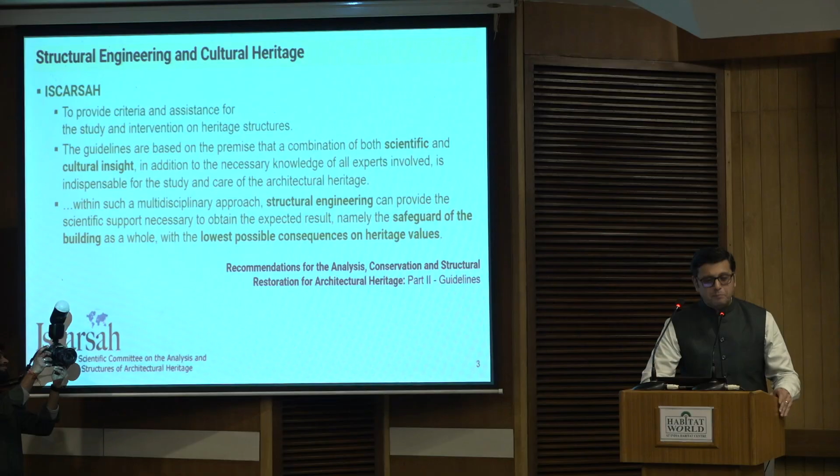So, in the 20th century, many of you are aware that organizations such as ICOMOS, the International Council on Monuments and Sites, were instituted. This was after the Second World War, and several advisory bodies to ICOMOS came up as well. One of them was ISCARSAH, and ISCARSAH is an active body today. ISCARSAH stands for International Scientific Committee on the Analysis and Restoration of Structures of Architectural Heritage. It's a long expansion of that acronym, but basically it looks at the structural aspects of historical constructions. Now, very much in line with what Jean Mignot talks about, ISCARSAH tries to give a basis, different criteria to study and intervene in heritage structures. And this body and its guidelines explicitly state that you need a combination of both scientific and cultural insight, and the knowledge of all experts involved. And this is indispensable for the study and preservation of architectural heritage.

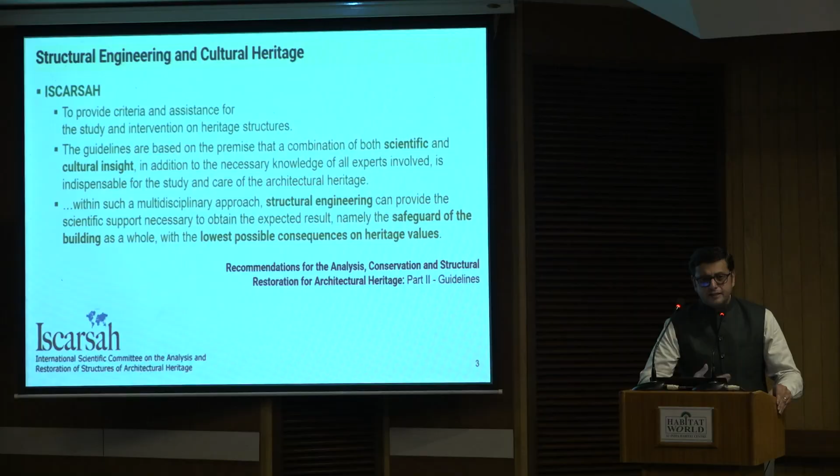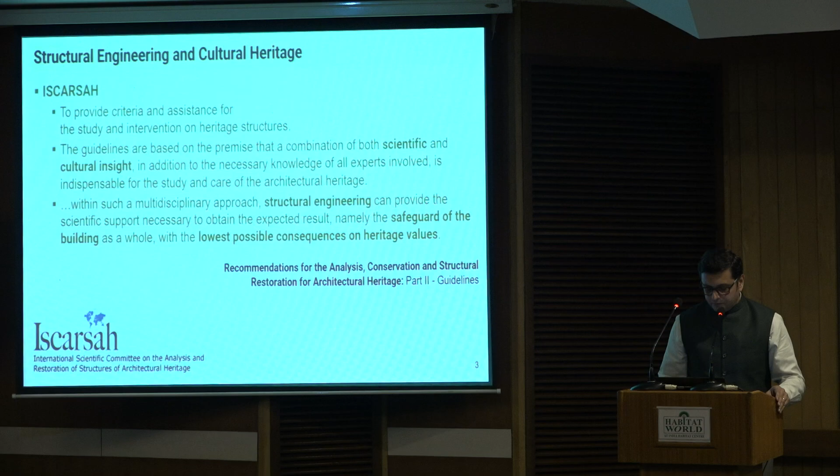And when you look at a very multidisciplinary stage where professionals have to interact, ISCARSAH identifies that structural engineering can provide the scientific support to obtain the expected result. And the result is really the safeguard of the building as a whole, but with the lowest possible consequences on heritage values. So you need to intervene to preserve it. And when you intervene, you have to be conscious about what the building stands for and ensure that those interventions do not dilute or erase those values. And structural engineering has a very important role there because it determines whether the structure survives or not. So I see the words of Jean Mignot and what ISCARSAH tries to do today in engaging the professionals involved in heritage conservation as quite coherent. What I've tried to do today is put together 5 examples.

As I said, all 5 don't deal with the ancient traditional knowledge system of Vastu Shastra or temple building, but they're all examples from India. I do have an example that really talks about where this Vastu Shastra and going back to Vastu Shastra can actually inform the subject of built heritage conservation.

So let me begin by talking about the Puri Jagannath temple. This is one of the most famous living temples, which is also an archaeological monument. The Puri temple is probably one of the busiest temples in terms of the number of pilgrims visiting the temple in a day. The focus of our work was really one beam in this 800 plus year old temple in the Natya Mandap. You have multiple structures within the Puri Jagannath temple. We were looking at one beam in the Natya Mandap which had cracked.

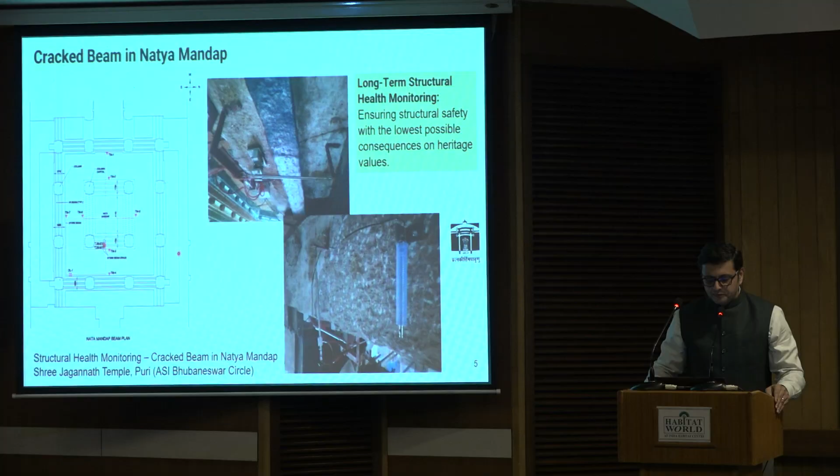Well, it's an interesting symmetrical structure, and right in the center you have four massive pillars, and there are beams that are supported by these pillars. And of course the roof comes and sits on top of it. Now, what really brought us to this particular project was what happened a few years ago in the Jagmohana, which is the larger mandap that is behind the Natya Mandap. The Jagmohana, with almost a similar configuration, in its central zone, with 8 massive beams, had all the 8 beams cracked.

Now, when these beams cracked was really not known. These cracks surfaced and were visible in 2015. And the question was, did these cracks really happen in 2015? But probably not, because these massive beams were plastered with lime and painted over, and there was a decision to take off all the plaster in the structures in Puri Jagannath temple. And when they started removing the plaster, they saw all these 8 beams had cracks.

So what was interesting is these cracks were wide. They had completely split the stone, and the lime was actually inside the crack, which is an indication that the lime plastering was done after the crack had formed, and it was not a recent phenomenon. So possibly the crack has been there right from the day it was completed or sometime later.

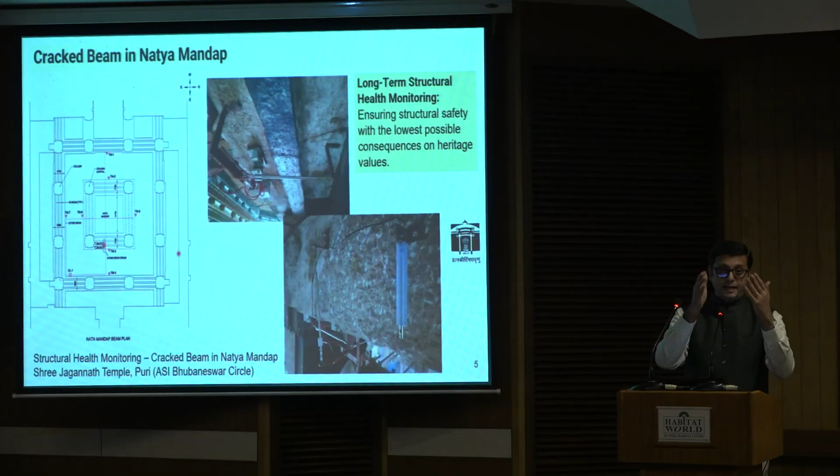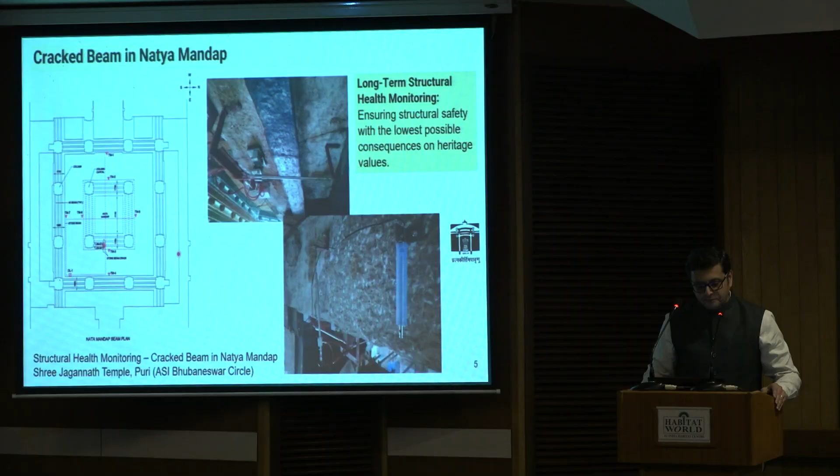But the entire discussion within this multi-stakeholder environment led to a situation where even before any scientific investigation could be done, all the 8 pillars were completely supported with very heavy steel columns, eventually reducing the space that you have to view the deity, which was really not a desirable outcome. Discussions went on for a few years, but it was a very difficult, very heated environment where decisions were taken without consideration of how the structure is behaving.

So a few years later, when a crack surfaced in the Natya Mandap, a few of us were very clear that we're not going to be putting any sort of support system there without studying these cracks, without understanding whether these cracks are really causing a structural danger to the life of the structure there. So in this particular case, since it was one beam, I think we had our way, and we were able to install sensors. It's very much like the human body: you can do tests, have sensors there, and study this for a period of time. Of course, you want to study them for a sufficiently long time, but a crack is a crack, and everybody wants action taken when they see a crack.

This was a court-monitored activity, and hence some decision had to be taken quickly, but you need at least 2 seasonal cycles to really understand if these cracks are structural in nature and if the movement in the building is dangerous. Why 2 seasonal cycles? Because you want to see whether the crack opens and closes with the variation in temperature as you go from the summer months to the winter months, and not because of structural loading. So this needed to be established. And as I said, we were able to buy time and examine the behavior of this crack for about 5 years.

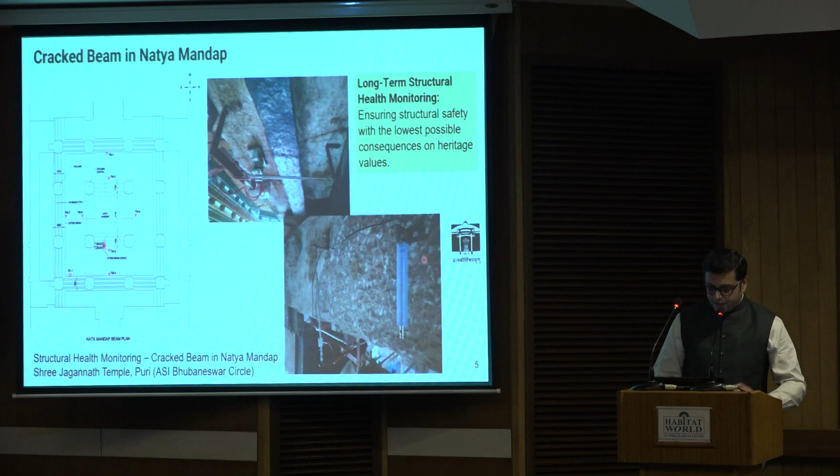And what you see here is the cracked beam and the sets of instrumentation that were put there. We put crack meters in place. We put a tilt meter in place to study how the entire system is behaving. And what you see here is a system which was accessible remotely.

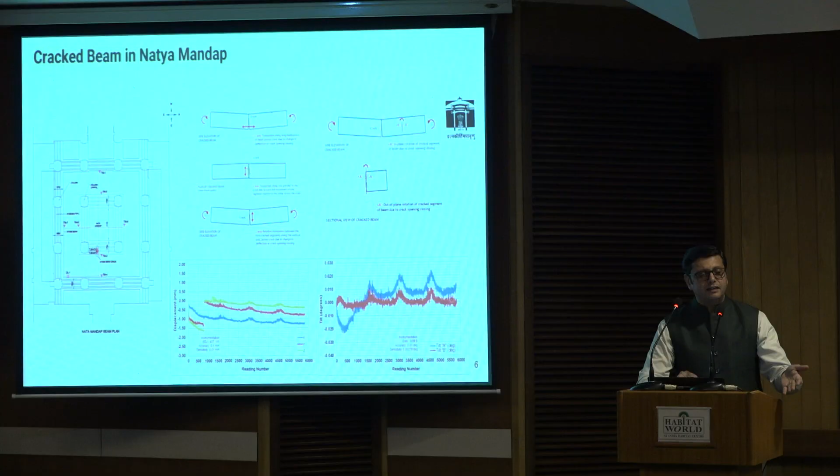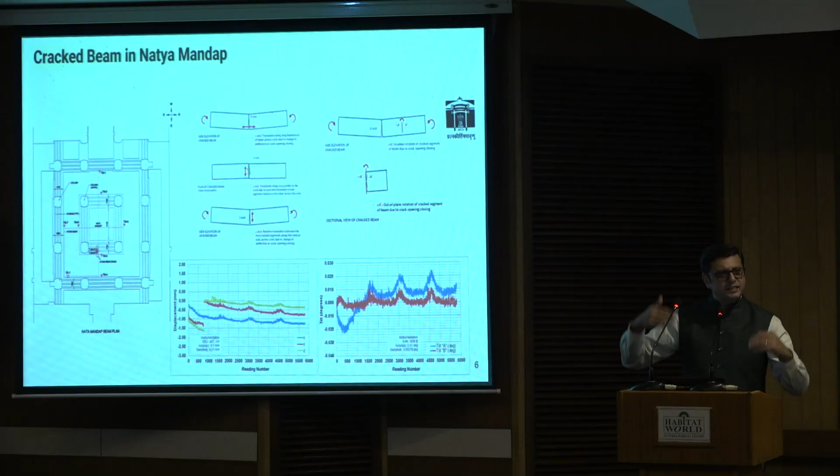Today, with all the technology that's there, we could access the data sitting in our offices at IIT Madras. And for a period of 5 years, every 4 hours, we had measurements of deflection and measurements of the tilt in these beams. And it became quite clear that at the end of the cycle, one summer and one winter, it would come back to its zero position and then continue the cycle. So you see it oscillating about a certain zero position.

And this was good news, which meant we had time to intervene, and since the crack could not be left unattended, the final intervention was carried out after a few years, but in a very careful manner, not to block the view that is there of the deity or the other mandapas from the Natya Mandapa itself. So eventually those beams were strengthened by adding additional steel beams in a way that was hidden away between the existing supports.

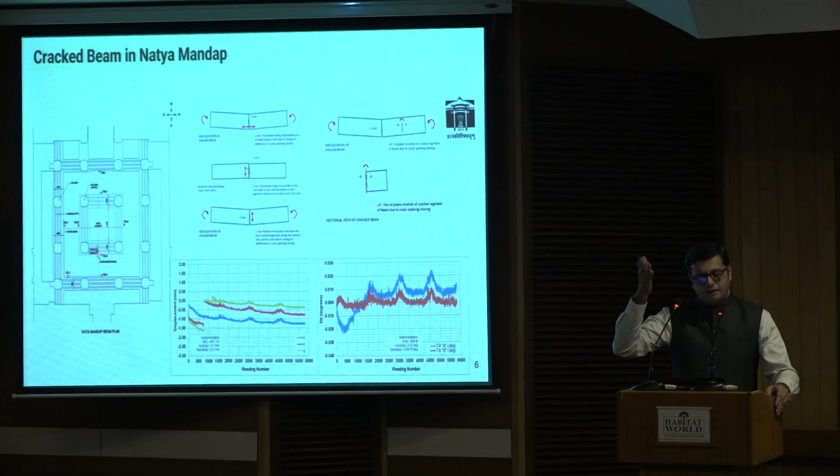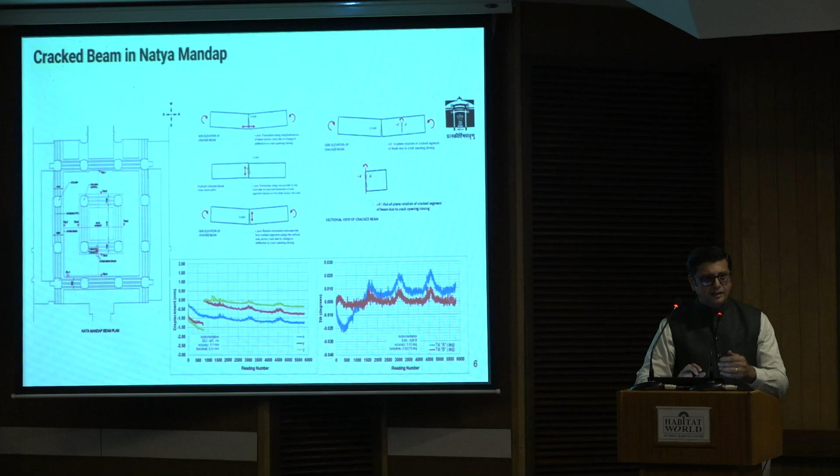So this was an interesting project where the understanding of the structural behavior was given the time and space required to then be able to intervene in a manner that does not change the essential character of the space. And this is where structural engineering really comes in. And this project was really, I would say, one-off, because very often it goes the other way, and then you want to put in very heavy interventions just because you're scared looking at the crack.

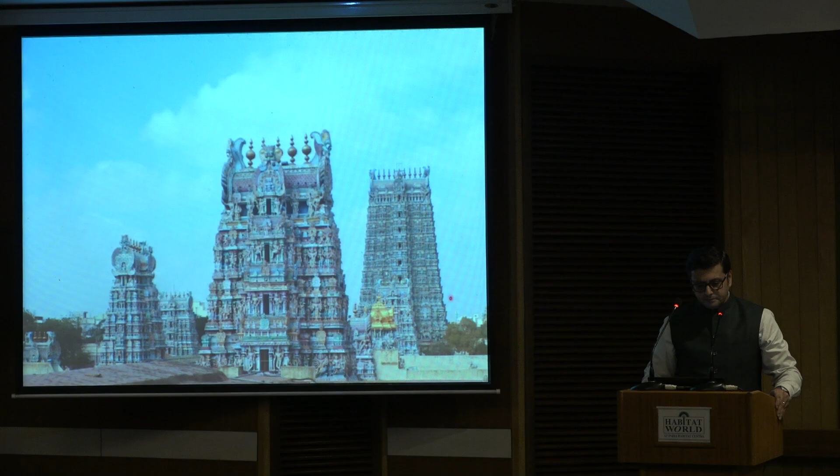The second project that I want to talk about is another interesting project, but there was a fire. Many of you must have visited this beautiful temple. It's the Madurai Meenakshi temple in Madurai, Tamil Nadu. In a part of this temple, on 2nd February 2018, it's 4th February today, there was a fire in one of the mandapas, and this is a 500-year-old mandapa called Veera Vasantharayar Mandapa, built in 1611.

It was full of shops, and it had a lot of wiring. It had a lot of plastics. It had a lot of wood. And at the end of the day's prayers, when the temple is shutting down and shops are closing, typically there's a ritual that's carried out. There's a camphor lit on a pumpkin to ward away the evil eye. And then the pumpkin is broken. The camphor just falls on the floor, and unfortunately, a piece of lit camphor goes into one of the shops and then starts a fire.

And this is around 10 p.m. in the night. And CCTV cameras capture the entire proceedings. And by about 10:15, 10:20, the whole space is filled with smoke, and the fire begins. And unfortunately, the fire engine stationed in the temple, this is a temple that is visited by hundreds of thousands of people in a day, didn't have water, and so they couldn't really douse the fire immediately.

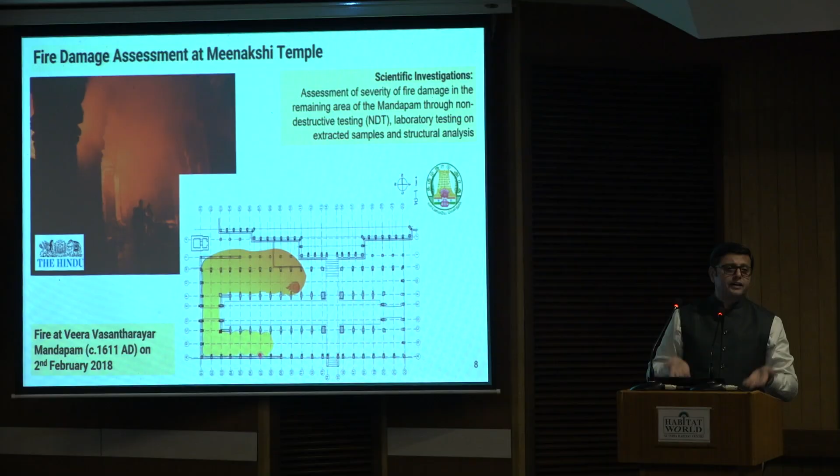And by the time the fire engines could be mobilized, the entire mandapam was burning, and there was so much inflammable material. The fire could be doused only after 5.5 hours. This Veera Vasantharayar Mandapam has about 110 massive stone pillars. It's a very tall construction. The fire spread to about 50% of the structure, and hypostyle halls are typically open everywhere, and you have a slab on top. So almost like a furnace, it was heating the beams and the slabs, and you can imagine if that went on for about 5 hours.

So it was about 4 a.m. or so that the fire tenders could actually douse the fires, but by then beams had cracked, slabs had broken, and the structure had suffered significant distress. What you can actually see are the broken beams, the slabs that collapsed, and what you can see here is granite that's melted. And that's something I was seeing for the first time. You can see that those beautifully carved stone beams have just become like plastic members.

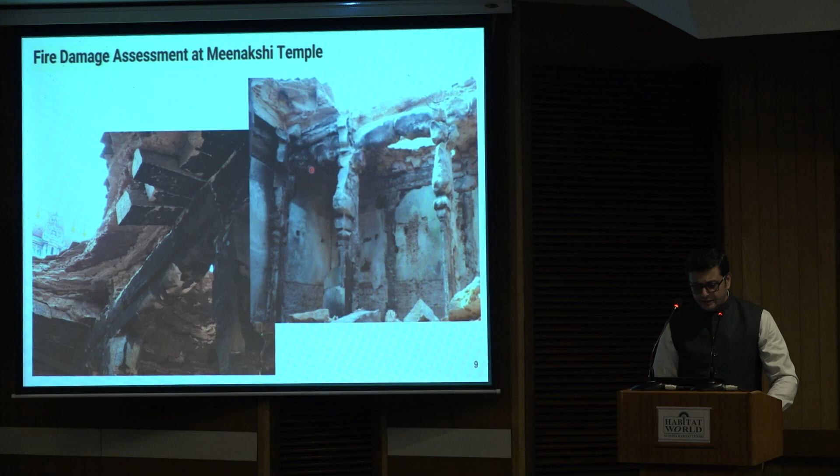So this was the state, and therefore, immediately the decision of the temple authorities was to start pulling down the entire structure and reconstruct it, because this is a living temple. But that's where it was important to take a step back and really see if it was essential to pull down the entire structure, given that it's a 500-year-old construction.

When this happened in 2018, the government announced that they would rebuild the structure in 6 months. But the wisdom of the committee that was actually looking at this, a multidisciplinary committee of about 12 persons, prevailed, and we were given the opportunity to really study the effect of the fire on the stone.

What we were able to discover was that the fire had actually spread in only about 50% to 55% of the entire structure. The rest was heated but not in direct contact with the fire. So we launched a detailed field experimental campaign, taking samples from all the pillars and beams affected by fire, and slabs which were still intact, to systematically understand what had happened to granite exposed to different stages of fire.

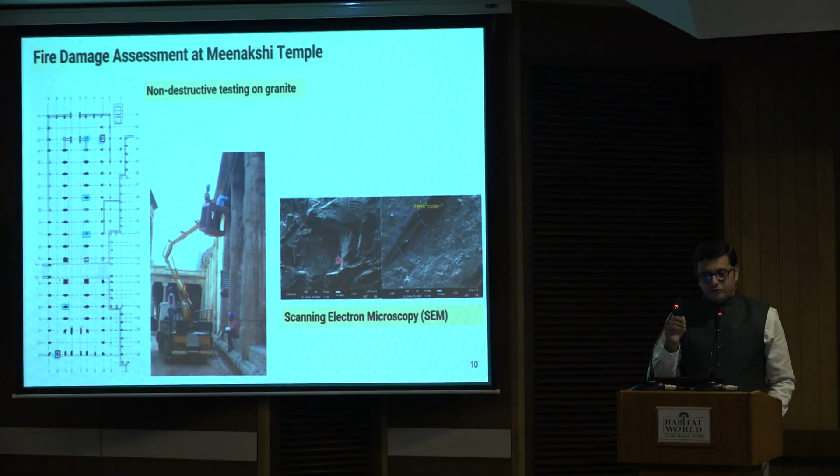You could see evidence of ferric oxide in the granite. The fact that granite is a very strong stone is because of the presence of ferrous oxide, one of the strongest types of stone for construction. But you didn't see ferrous oxide in these images, only ferric oxide, which meant ferrous oxide was converted to ferric oxide due to oxidation and the heat process. Ferric oxide forms at about 623 degrees centigrade, meaning all portions showing ferric oxide had reached about that temperature.

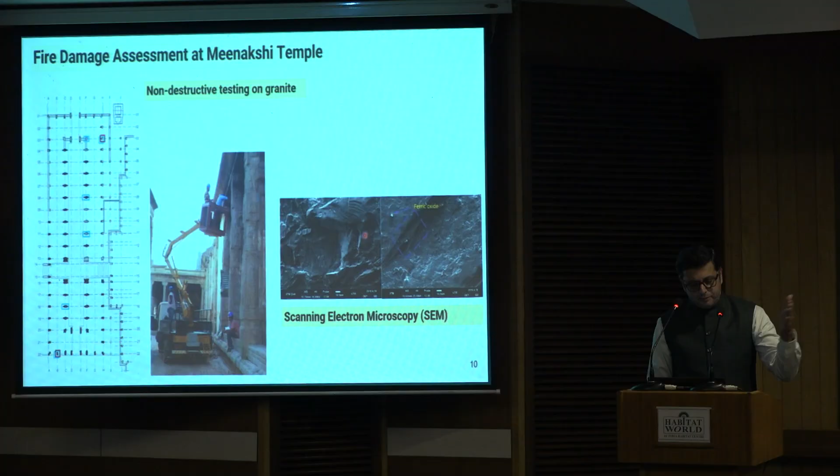Granite melts at about 1,300 degrees centigrade. So this was important forensic information to understand which parts of the structure were affected to this extent, and which were not. This and a series of other tests involved taking samples of stone from 6 different degrees of damage to study what had happened to the stone.

We were finally able to convince the authorities that about 50% of the construction could be retained as is, and that a 500-year-old construction need not be pulled down and reconstructed into a brand new mandapa, losing its historicity. The decision was finally that only 50% would be pulled down; the rest, what you see there, is retained.

Currently, about 6 to 7 years after the tragedy, the stones that are going to replace the ones taken down are massive pillars, at least 20 to 30 feet in height. These are being sculpted, and in a short while the reconstruction would begin in that dismantled part of the structure.

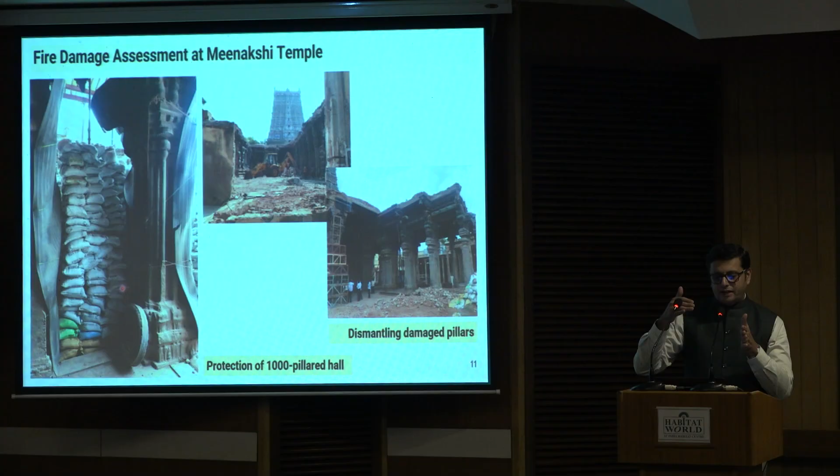If some of you have been to Madurai Meenakshi Temple, this is right next to the 1,000-pillared, or Ayiram Kal Mandapam, which is a sculptural marvel. The biggest fear was that if there was a sudden collapse of the fire-damaged mandapam, or if something went wrong while dismantling, something could fall onto the 1,000-pillared hall and cause an international headline.

This was a big thing they wanted to avoid. So a cut was made right at the top of the structure, isolating the 1,000-pillared mandapam from the fire-damaged mandapam, so that vibrations from dismantling were not passed on. All sorts of methods were used to cushion anything that could fall onto the 1,000-pillared mandapam. This is an interesting project where scientific investigations were able to inform preservation.

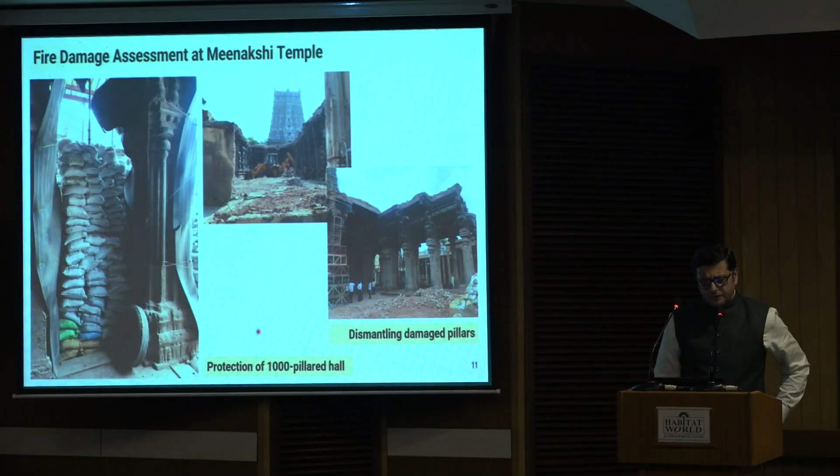Scientific investigations continue to inform the type of stone that needs to be selected. Out of 8 quarries, we've now selected 1 quarry which has stone that matches what was used 500 years ago, through petrographic and mechanical studies and so on. So this was an interesting project that showed how science can help in the process of conservation.

The other project that I would like to talk about is the Rashtrapati Bhawan. And of course, there are many things in the Rashtrapati Bhawan that are extremely interesting.

Professor A.G.K. Menon was leading that project from INTACH. This was a project where the part that I really want to talk about is the sunshades.

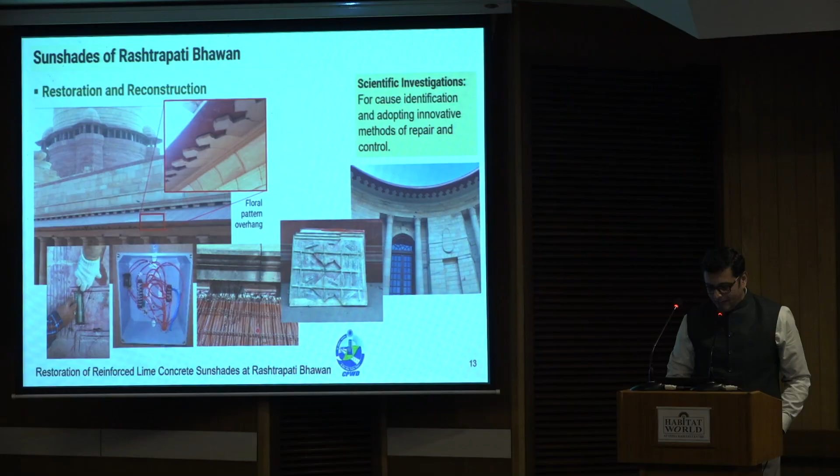These are beautiful sunshades, massive sunshades. As you stand in front of Rashtrapati Bhawan they look like small sunshades, but they're actually 2 meter cantilevers. They're about 1.2 kilometers long if you look at the sunshades all around the building, so it's a huge amount of construction material you have to deal with.

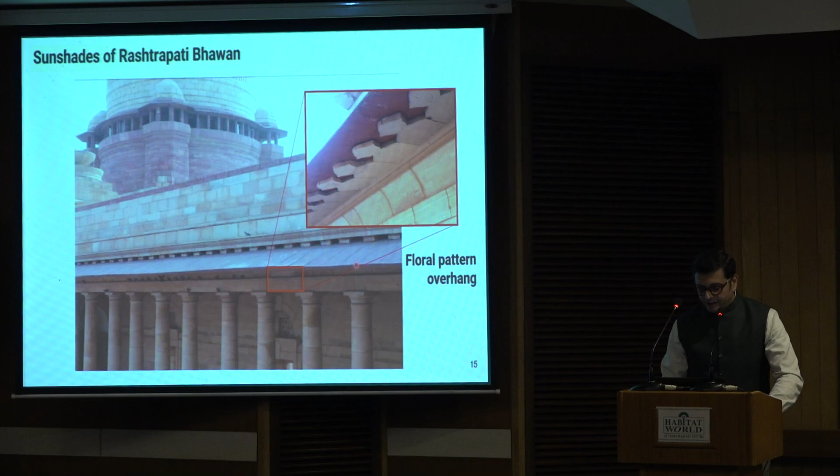Unfortunately they have this very beautiful floral pattern that you can see from the bottom, with red sandstone and pink sandstone combined to create this entire sunshade. But if you go a little closer, they are in really bad shape, and for a moment you would think this is all in stone.

So this is not in stone, this is in reinforced concrete. You can see corroded reinforcement and spalling of the cover concrete. And you don't want to have cover concrete spall off from 50 feet high as you're entering a building, when you have sunshades 1.2 kilometers all around the building, with VIPs and everybody moving in and out. So this was the condition.

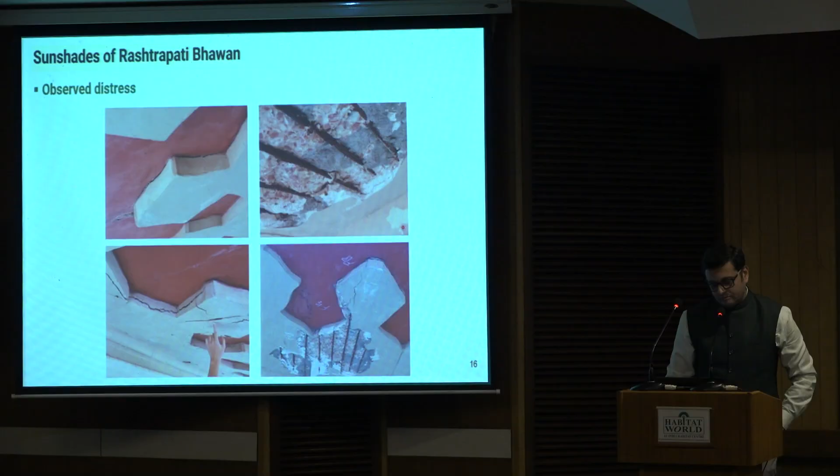This is where we were asked to look at the problem of the sunshades and give some solution. There was a lot of patch repairs, like we do when there's corrosion damage typically happening, but the patch repairs were definitely not working, because the patch plus new material would just fall off very soon. So this needed to be studied.

We did some archival research. We found the drawings, the original drawings. Rashtrapati Bhawan maintains all these original drawings. What's interesting is, after completion of the building, completion drawings signed by the Public Works Department are available in Rashtrapati Bhawan, which is fantastic for any engineer or architect working. To find as-built drawings is a treasure, and as-built drawings were available.

What's interesting is the original plans from 1915 and the 1930s, when this building was being constructed, show that Jaipur sandstone, the pink and red sandstones, were meant to be used for the sunshades. There is information on the procurement of the stone for construction of these sunshades, and details of how the stone was going to be anchored into the walls, into the stone masonry walls. So then you would expect it to be stone masonry.

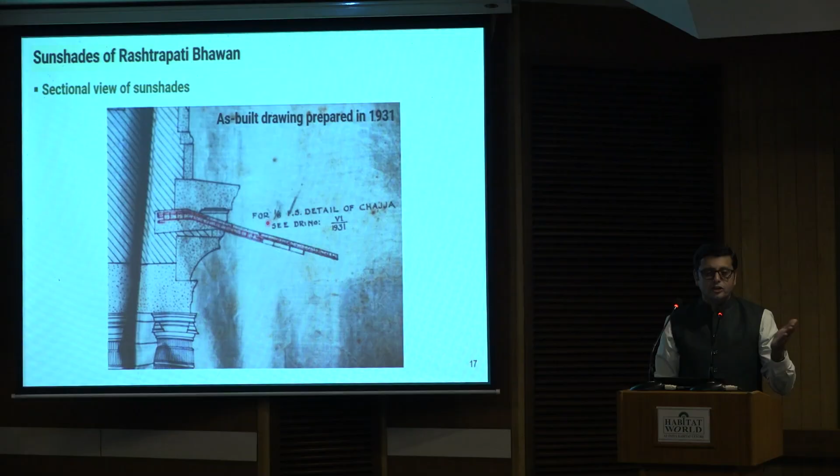And what concrete? That was the second question. This is a set of drawings we prepared after taking measurements and looking at the as-built drawings. We really needed to figure out why there was so much corrosion. If you look at corrosion and the types of steel used 80, 100 years ago, they are not so badly affected by corrosion. It's the modern steel that gets more affected, because to make it more malleable we reduce the carbon content, and it becomes less resistant to corrosion.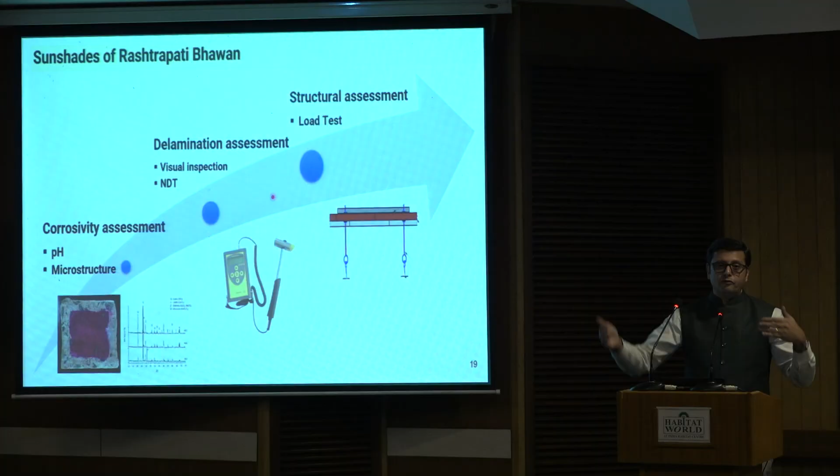So we really wanted to understand what was happening, and a series of tests on the material had to be carried out. We did corrosion measurements and delamination assessment, because in certain locations you could see the sunshade losing its cover concrete, but in other locations you really didn't know what was happening because it looked intact, but it could just come down. We were also worried these sunshades, which are 2 meters long, might just drop off, so we had to do a load test in situ.

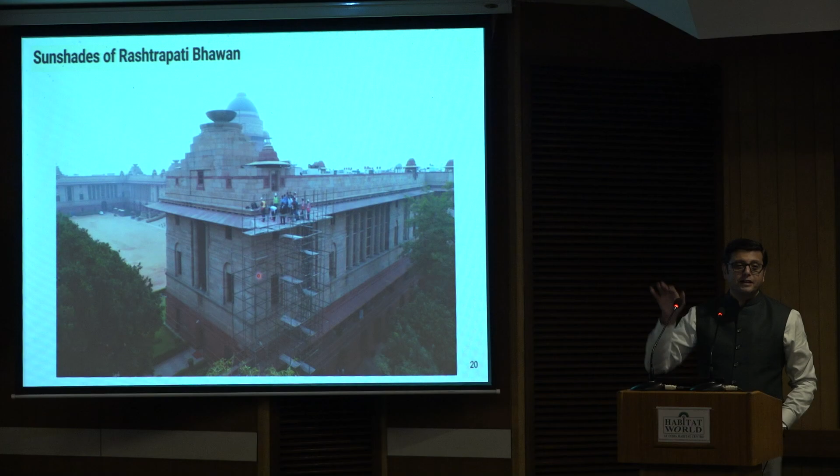This is a picture taken by a drone. We had our team work on the sunshades, walk beneath and above them. We also had the fire department come and give us their fire truck so these sunshades could be accessed. Tests were conducted, and what was very interesting was we found that cement concrete, if cement is used properly, should provide some resistance to the movement of corrosion-entraining elements. But this concrete had nothing like that.

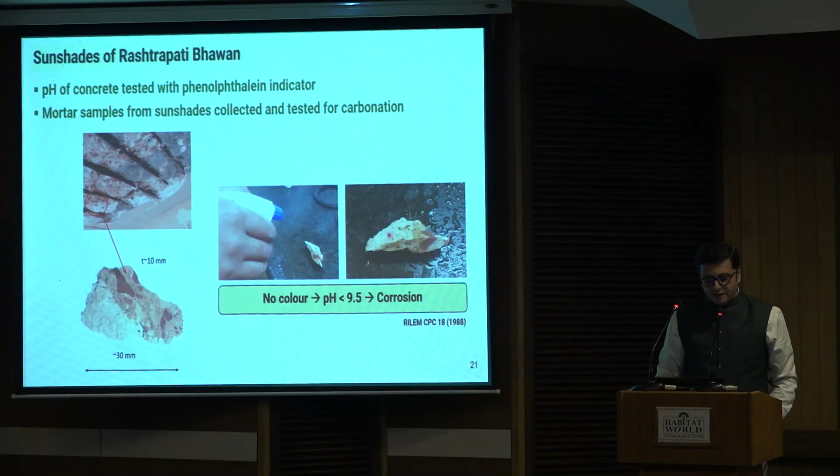And it started becoming evident that it was really lime that was used for concrete and not cement. Multiple tests that we conducted, from visual to all the other tests, confirmed that we were looking at lime concrete and not cement concrete.

The problem with lime concrete is that it does not create what is called a passivating layer that prevents moisture and air from reaching steel. Lime is highly porous and allows moisture and air to reach the steel, and that was really the reason why in about 85 years the entirety of the sunshades had corroded. So this was an incompatible combination of two materials, lime and steel reinforcement, that led to extensive corrosion, and this had to be dealt with.

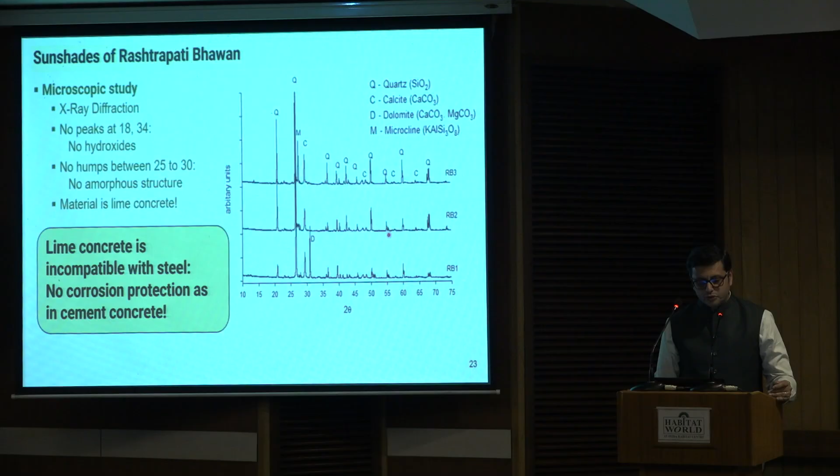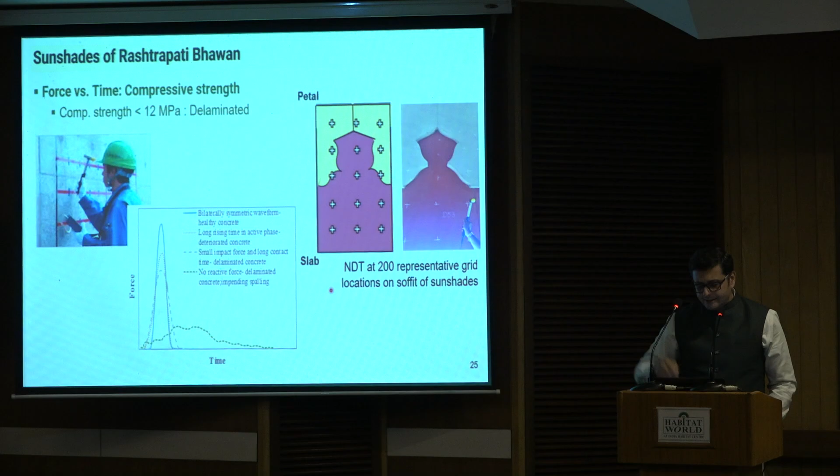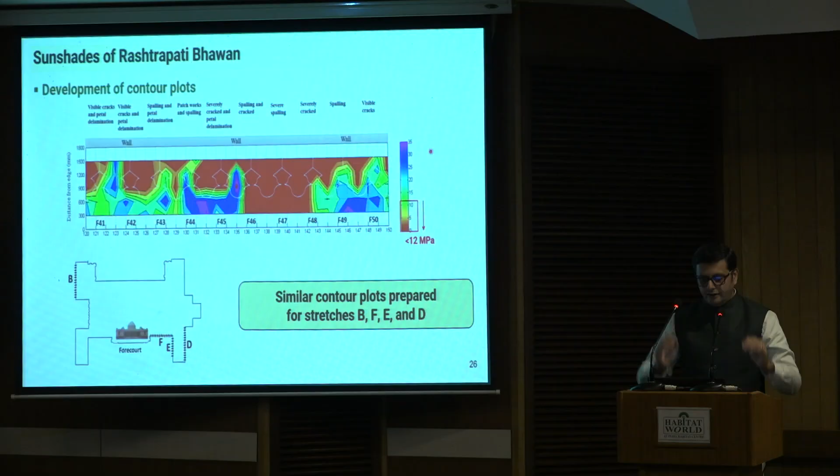We also tried to undertake studies to see how much delamination was happening, and the statistics were really scary. This was done by tapping and looking at the nature of sound you get, and measuring that. This shows an example of a scan, where wherever it's red, it's completely detached, and the other locations, the cover concrete is still more or less intact. The statistics were very worrying.

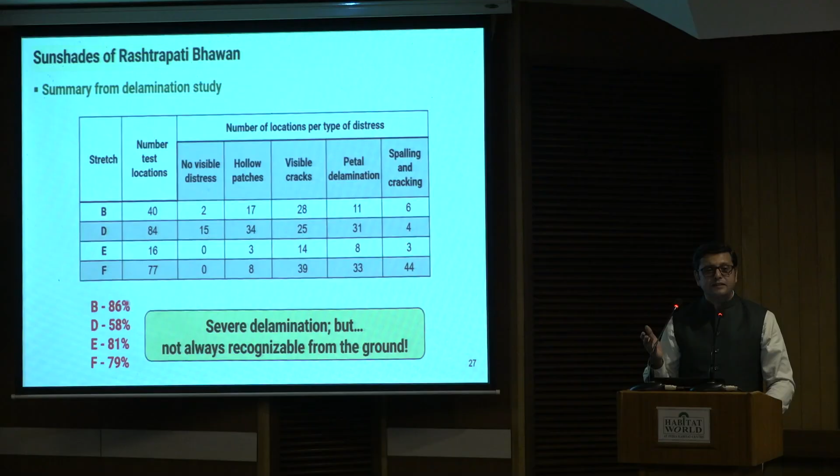We did 4 segments, and in these 4 segments, about 86, 58, 81, and 79% of the cover concrete had actually detached and was waiting to shoot. So it was not safe in any context.

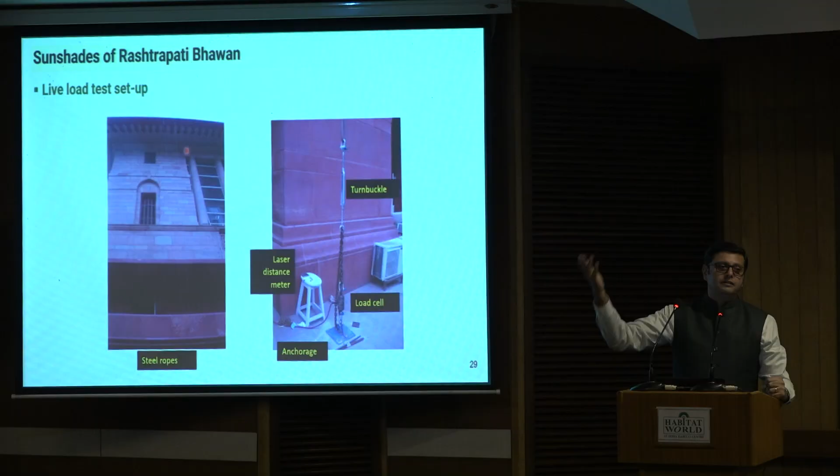So we decided to do a load test. We put this loading beam on top, and what you can see next is how we pulled this beam to try and see at what load this sunshade is expected to fail, because every Independence Day and Republic Day a lot of labor goes onto these sunshades to put up the lighting when Rashtrapati Bhavan is lit up. So there was a safety angle which needed to be addressed.

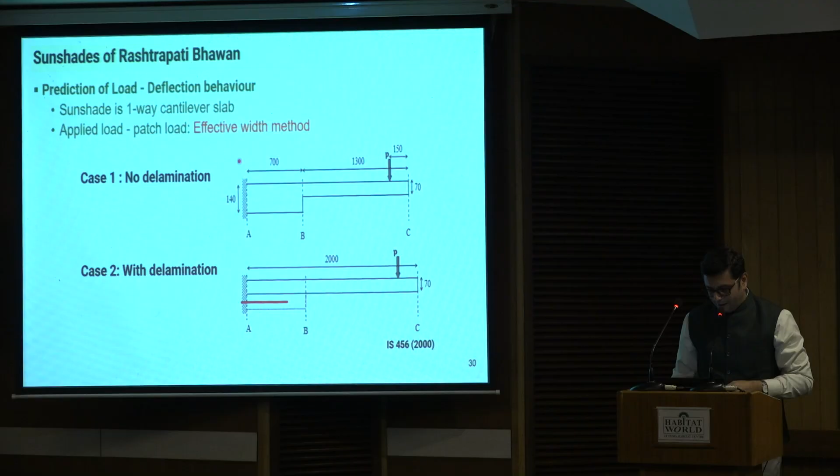So we did this test, and engineers are very interested in doing calculations, so we also tried to predict it theoretically. You start getting really happy when predictions and experimental observations match. We had some theory by which we could calculate how much these slabs are expected to deflect. We did those calculations without the cover concrete, and with the cover concrete completely corroded and partially corroded. Our experimental measurements sat very well with the theoretical calculations, so all the engineers were very excited.

Then what did we have to come up with in terms of repairs? We found that these sunshades were really not precast, they were actually cast in situ. And to give the impression that this was made of stone, they were first painted in pink and red, but they also put a line at the top every meter to make it look like pieces of stone. So they were really not precast, they were cast in situ, and they were all cast together. That reduced the possibility of a single slab just collapsing when heavily corroded. So that was something that we discovered.

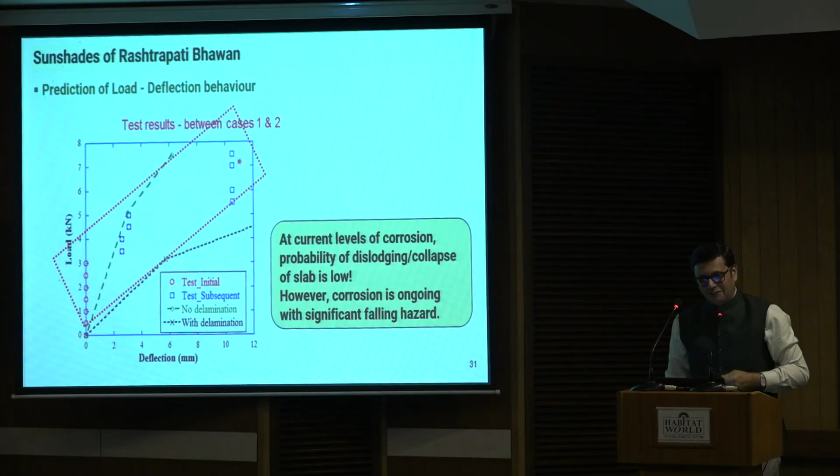Something very interesting happened as we were doing the study, standing on top of it and taking measurements. There was an elderly gentleman who works at Rashtrapati Bhavan. He asked us what we were doing, and we explained that we were trying to find out if a single piece would come down. When we were almost finishing the test, he said, this is all cast together, what are you doing? But it's good to discover the truth for yourself.

Repairs, I think we went through many cycles. We decided we could do protection of the steel using what's called cathodic protection, and we implemented it for about 10 meters as a pilot study. Cathodic protection means you retain the steel, you create an electric current, and you have a sacrificial anode which gets corroded and your steel is saved.

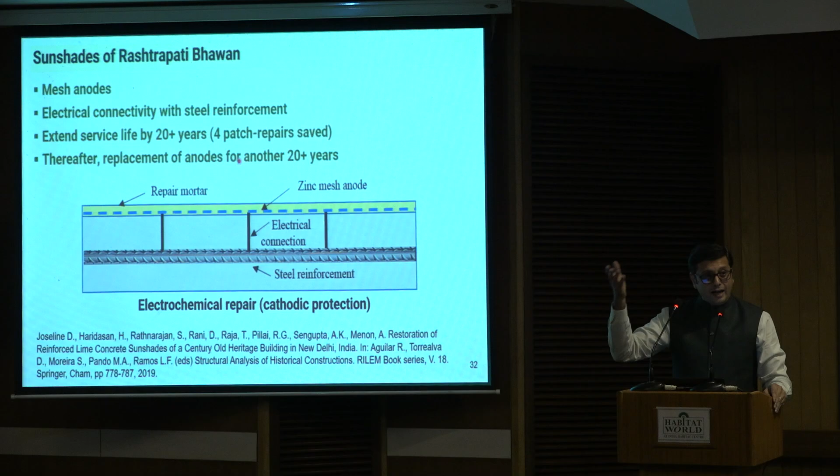So we put that in place. We did it for about 10 meters. It worked very well. The pilot project was expensive, but it worked really well. Everybody was excited after that, and they started dismantling the concrete of the rest of the sunshades to put in place this technique. But then, in the excitement, they ended up with a collapse of a part of the sunshades, so this had

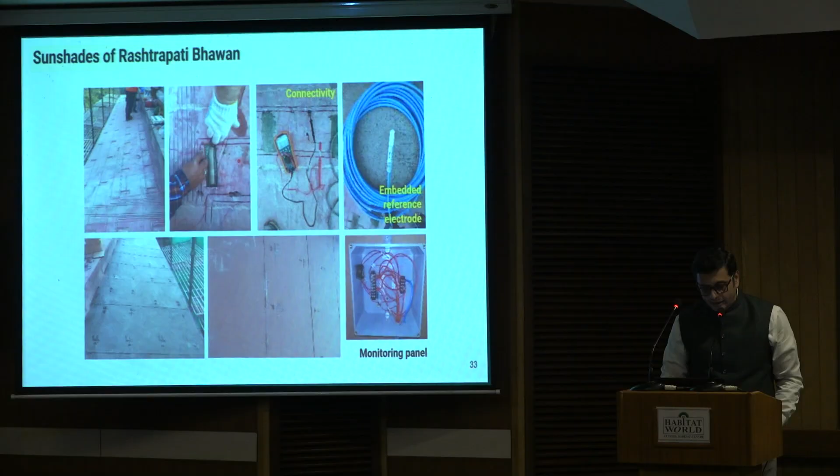to be shelved. And after that, finally, cathodic protection was done, but the concreting was done with fresh concrete for the entire segment, the entire 1.2 kilometers if you want. This was put in place. All this work happened during the pandemic. And finally, molds had to be used to create the patterns that we see, which look like patterns in stone. And we also put the line on top, which makes it look like pieces of stone.

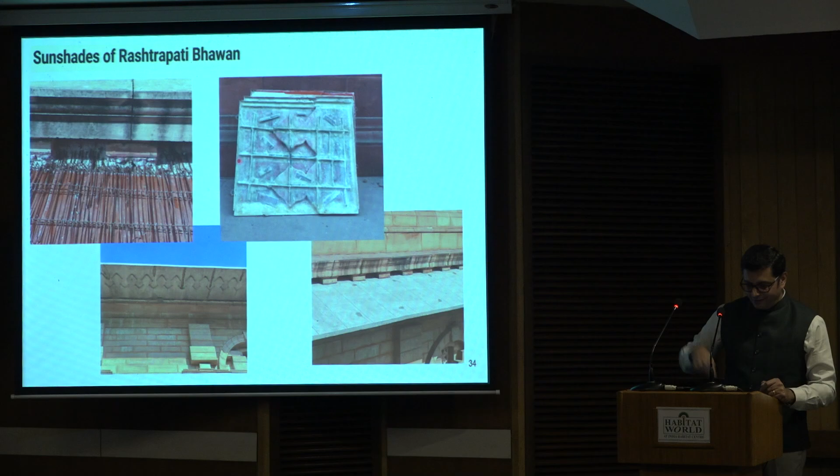This was completed, and today you can actually see fresh reinforced concrete stone look-alike sunshades in Rashtrapati Bhavan. So this was an interesting project where the scientific investigations gave multiple insights on how the construction happened and how the damage actually happened over time.

This is a project of a 12th century Chola temple in a village by the name Thukkachi in Kumbakonam district in Tamil Nadu. And it's called Sri Abathsahayeshwarar temple. And the reason for talking about this temple is really, this was a pilot project that we did in 2020 for the Hindu Religious and Charitable Endowments Department of the Government of Tamil Nadu.

And this is a project where we really took some effort to understand how these temples are built, form and geometry, and structural dimensioning, because a lot of dismantling and reconstruction was required. And from that perspective, these activities are going to be done by the traditional builder, the Sthapati or the Sompura.

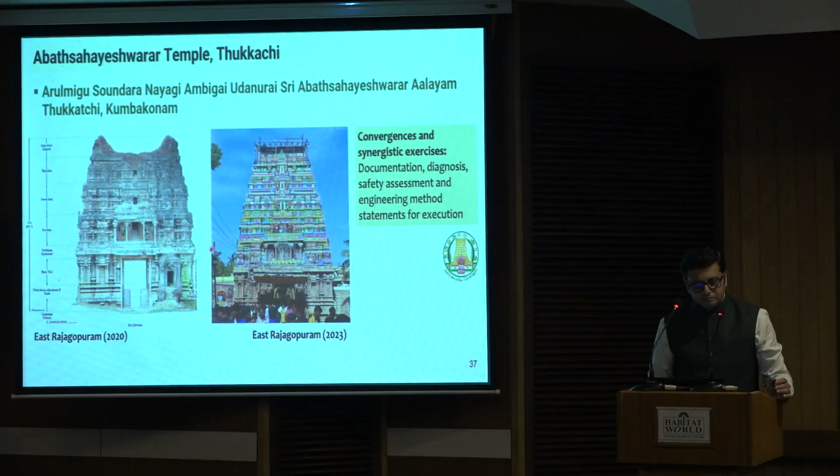However, the project reports are being prepared by engineers and architects who are trained in the modern way of learning. So there needed to be some sort of an understanding of each other's methods. And this project being a pilot project, we really wanted to leverage that sort of a learning. So this structure has been in distress for about 70 years and not been in worship.

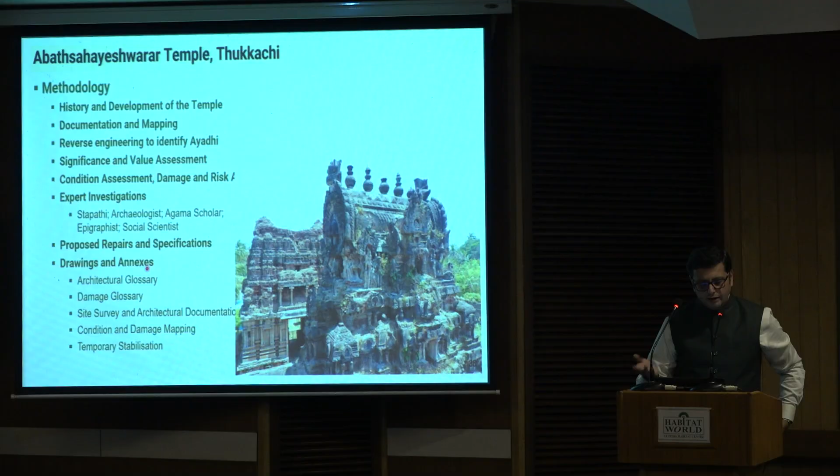It's a 12th century structure, and the pilot project looked at a systematic multidisciplinary study leading to final condition assessment, involving multiple experts, and then coming up with the project report and execution of the restoration. So it's a Shiva shrine built by Rajendra Chola and expanded later by both Kulothunga Chola and Vikrama Chola. And it's really the last phase of the Chola Empire that saw this construction.

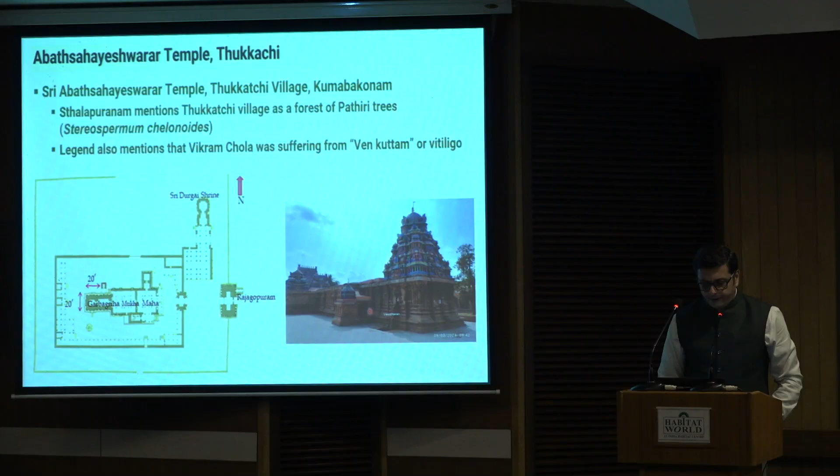This is a picture after the restoration. The temple is called Thukkachi, and it actually comes from Durga Archi, meaning Durga's rule. So it's a Shiva temple where there is a Durga shrine, and the village is known by the name of Durga. Durga Archi meaning the place where Durga rules.

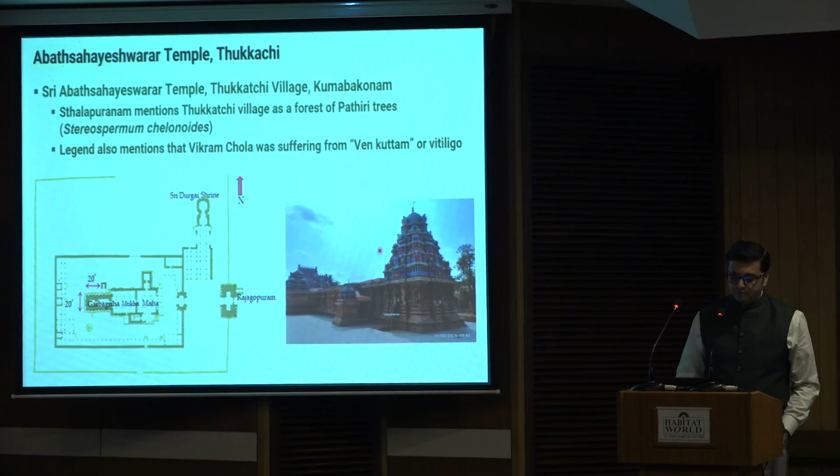And this is a temple where there was a spring which had healing properties, and a number of people would come to this place primarily for health reasons. So this is the temple. This was the condition of the temple for several decades. You can see there are parts that have collapsed. There are multiple efforts to restore this. You can see that there's dismantling and reconstruction attempted, but never completed.

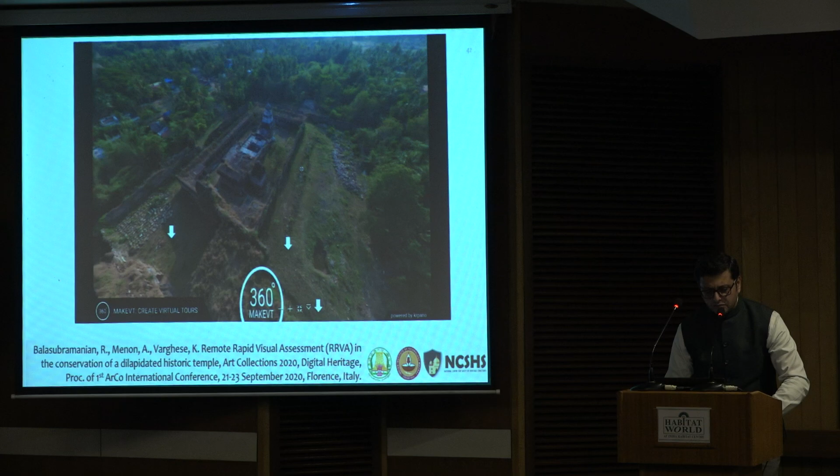Lots of problems. And so when we started this, this shows you very quickly the condition of the entire structure. Multiple portions had come down, and it was almost inaccessible in certain locations, even for the assessment. And so we had to devise methods of actually capturing the condition of the structure. We did this using a drone, we had this remote rapid visual assessment that we had worked on, which helped a lot in the assessment, because there was definitely a safety issue in the structure.

Let me move on. So the interesting part of this was when we started working on this, we really wanted to understand how would a Stapathi approach this, and what was the science with which the structure was built. Selection of materials is one, but what about the proportioning? And then we came across, in our interactions with the Stapathis, this entire science of Aayadhi Ganitham. And that's something that we really don't learn about at all. And this is one of the most important design elements from Vaastu Shaastra, and very much utilized for temple construction.

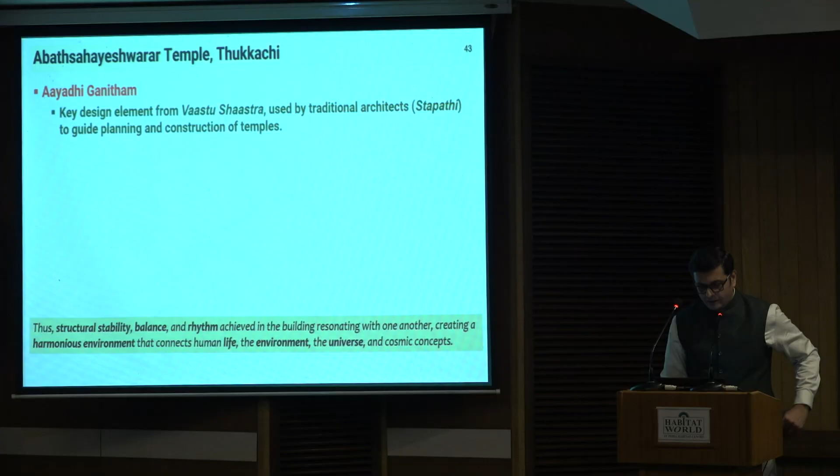So this basically helps in planning and construction of the temple. And what does it boil down to? Ganitham is the mathematics, and Aayadhi is a number. I'll tell you in a moment what this is all about. And in a certain set of formulae, very structured formulae, to even understand that they had very systematic mathematical processes to arrive at this. They would arrive at what is called an Aayadhi.

It's one single number. It is one auspicious number that is associated to a given temple or a given built space, and it's derived from astrological parameters. Directional influences of the earth also matter. So this one number is selected, and how does one select the number is really all mystery for us. And then this is used in the construction of the temple.

And how does that happen? This number is considered auspicious. It's believed to ensure the temple's continued spirituality and durability, longevity. The longevity of the temple really depends on this Aayadhi number, is how a Stapathi approaches the whole problem. But what this number is: it is the basic unit of dimensioning of a temple, of the plan layout, of the elevation, of the decorative features, and everything that you can think of.

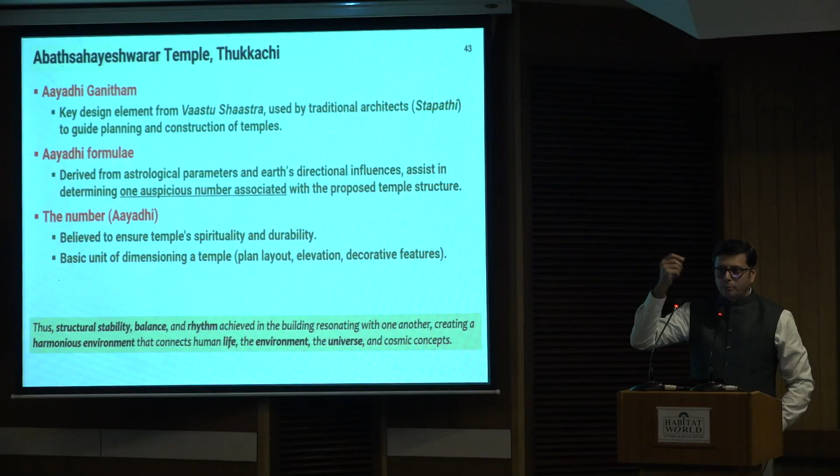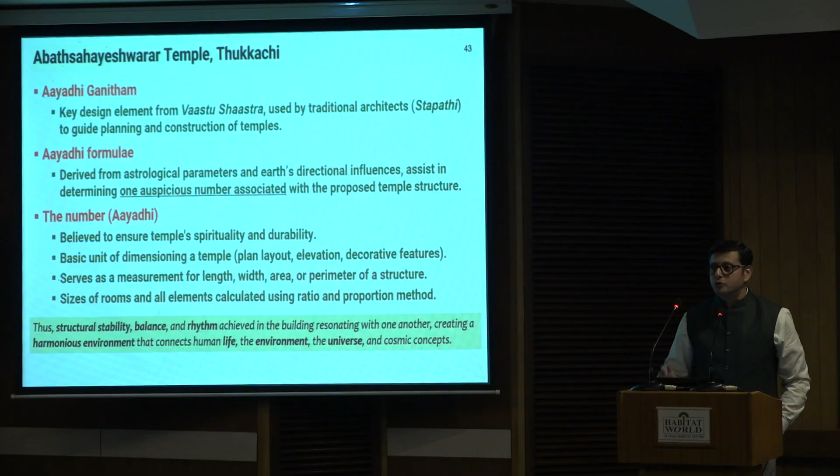So this one number is like the horoscope of this entire temple. It serves as a measurement for length, width, area, or the perimeter of all the structures. The sizes of rooms and all the elements are calculated using ratio and proportioning methods. So you take this number and then multiply this by as much as you want, proportion it with other aspects, and go ahead. So what is this all about?

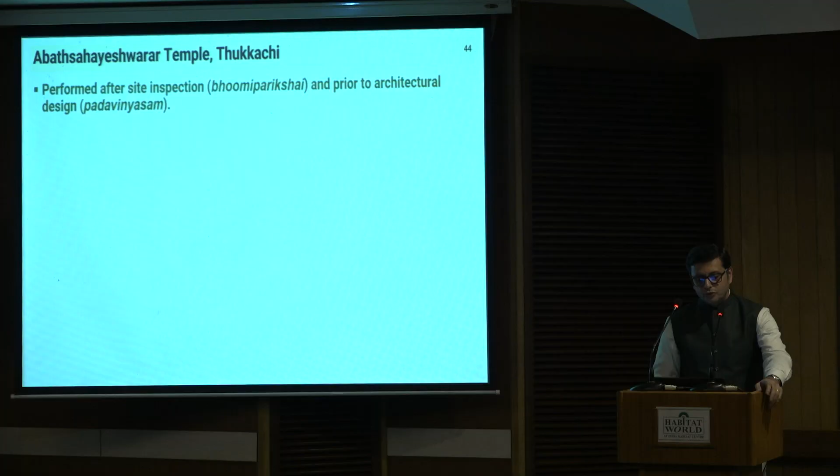This is actually the step just before the design; architectural design in the language of the Sthapatis is Padavinyasam. So you draw the layout of the structure. So the number is selected after the site is selected. So once you choose the site after doing Bhoomi Parikshai, which is also a very scientific process, it looks at the quality of the soil and does tests on the soil to understand how it performs. And after you do that, you select the number and then do Padavinyasam.

And so what is this Ayadhi number? A certain odd number is assumed. What odd number? We'll come to that. That odd number is multiplied with another number and divided by another number. So there's some assumed odd number, and that's the critical aspect. That assumed odd number is then multiplied, and then this entire thing is divided by another number. So a little example here.

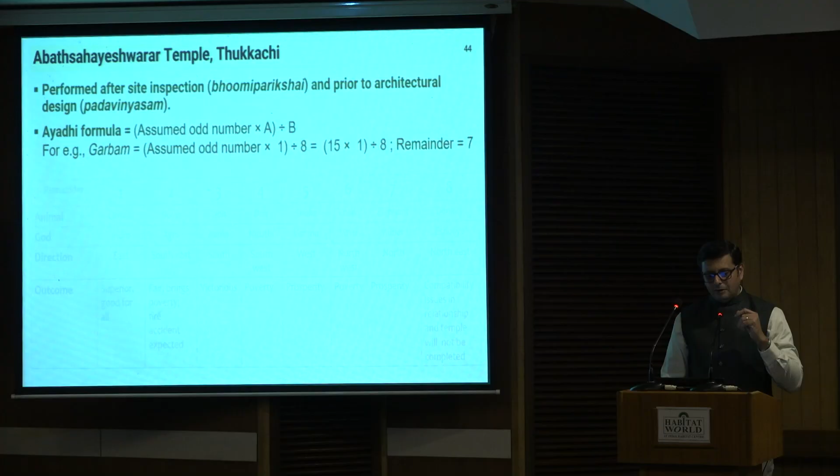The Garbhagriha, the dimension of the Garbhagriha, the Sanctum Sanctorum, is arrived at by taking this Ayadhi number, the assumed number, multiplying it by something, and dividing it by 8. It's always divided by 8. When it's divided by 8, you will get a remainder, and the remainder gives you an idea of the expected quality of that construction. Okay, so there is a metaphysical layer that comes in here, but we need to take the process as it is and understand how.

So whether that Ayadhi number is actually an acceptable number depends on what the remainder is, and as you can see, the remainder has certain qualities. There is an animal representing each of the remainders, but then the outcome is the important aspect. Some numbers will give you a superior quality of life, some will give you poverty, some will give you incompatibility issues, some can create situations of accidents. So there is a certain linkage between the number that's selected and the outcome of the number that is used to dimension the site, the temple.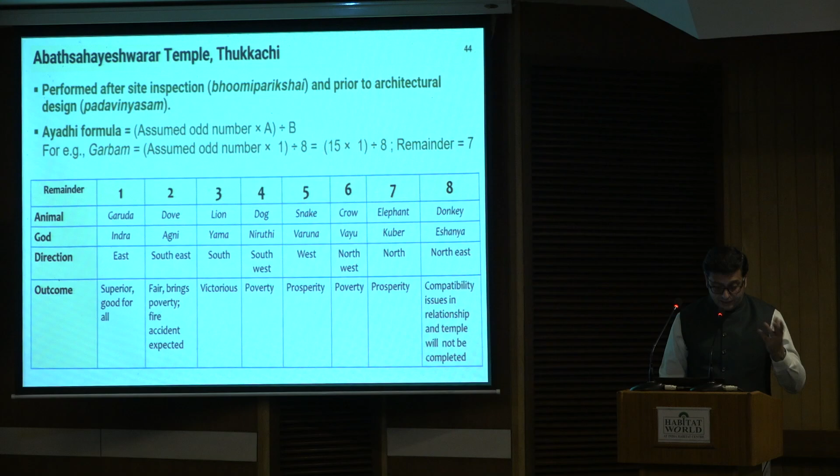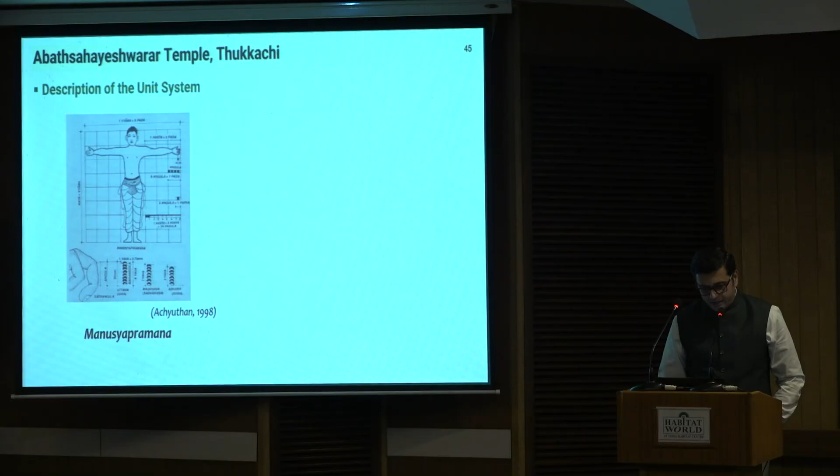So where does this number come from? This number is actually related to the human body. Manushya Pramana, which is the dimensions which are there in the human body. Angulam, and I'll come to that. And where does this dimension of this angulam which is used come from? It comes from the grain. And grain is something that is very regional.

Each region would have the grain that it produces, and you take the dimension of a single grain. A superior grain is one which is x in width and 2 times in height, x and 2x. If you place 8 grains together, you get a superior dimension. If you place grains together and it's not x by 2x, if you place 8 of them together, you will have a dimension greater than 8 times 2 into x. So that will actually tell you whether it's a medium dimension or a superior dimension or an inferior dimension.

Once that happens, this dimension of 8 grains together, the superior dimension, is referred to as 1 angulam. It's the finger, right? That's basically 1 3/8 inch or approximately 3.5 centimeters. So this angulam is then used for the measurement.

You're looking at a period when the feet and inches or the SI system was not there, and measurements went by the local grain that was available, which meant region to region, 1 angulam could be different because it would depend on the grain size of that region. So you might end up with some surprises when you're making these calculations because it might not match with the 3.5 centimeters here, that may be because of the grain available in that region then.

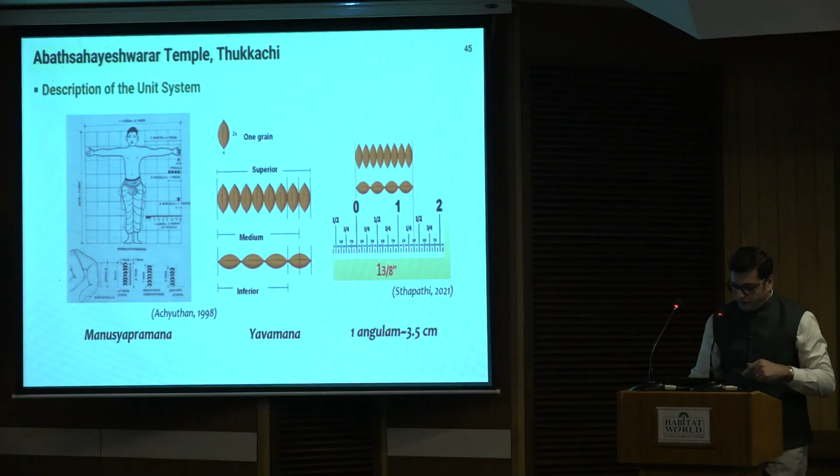So this is interesting. So then the ayadi is expressed in so many angulams. This ayadi number then becomes the perimeter of the sanctum sanctorum. And then rest of the structure is a proportion of that, is a ratio of that perimeter. So what we did is to be able to appreciate this traditional knowledge system with which the temple was constructed and the structural systems are dimensioned in the Thukkachi temple, we took the measurement of the perimeter of the Garbhagriha and then worked backwards to see what might have been the ayadi number used for the construction of this temple.

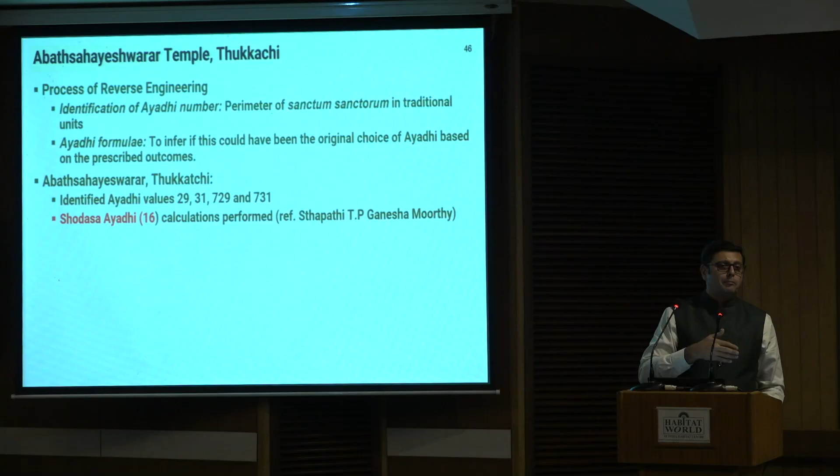And for every temple, there would have been a certain ayadi. So here we identified numbers like 29, 31, 729 or 731, which might have been the basic ayadi which was used for dimensioning the perimeter of the temple. There are multiple equations that can be used to arrive at this. The most complex has a set of 25 calculations, but mostly a set of 16 calculations. Shodasa ayadi is what the Mayamatam prescribes, and also treatises like the Kashyapa Shilpa Shastram also propose. So using that process, we found that the ayadi of this 12th century temple is possibly 29 Thanjai muzham.

Now, what is 29 Thanjai muzham? Muzham is, if you know, in Tamil, muzham is the way when you go and purchase a string of flowers, it's measured. So it's basically that much. Okay? Depends on the person who is actually measuring it and giving it to you. But one muzham is this forearm. Now, 29 Thanjai muzham is 29 angulams. So 29 angulams, using the Tanjai rice from Tanjore, would have been the basic measurement for the temple built in the Tanjore district. So this number was the number that matched perfectly with the dimension of the Garbhagriha.

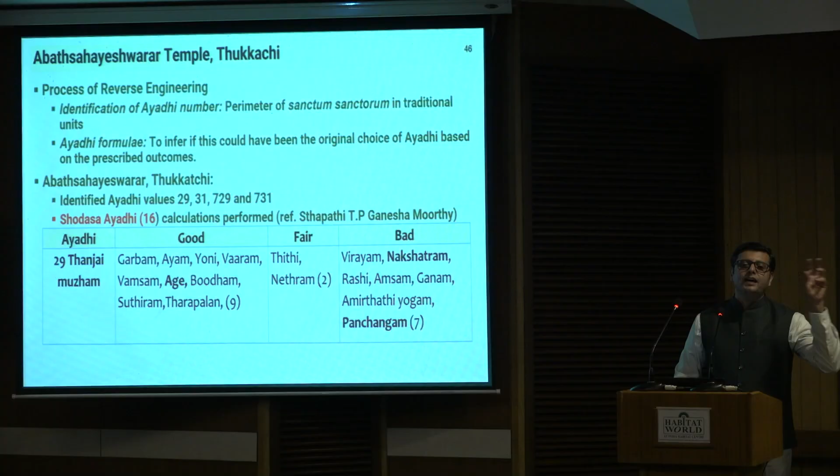And then when we looked at that number and looked at the 16 calculations that you do, we found that out of the 16, there were mostly good characteristics for the ayadi number. So that was the process that was generally done. You choose a number, try to see if the outcome is good. If it is good, continue with the construction. If not, change the number and then pick up a number which is good. So we did this, and this was a very interesting process.

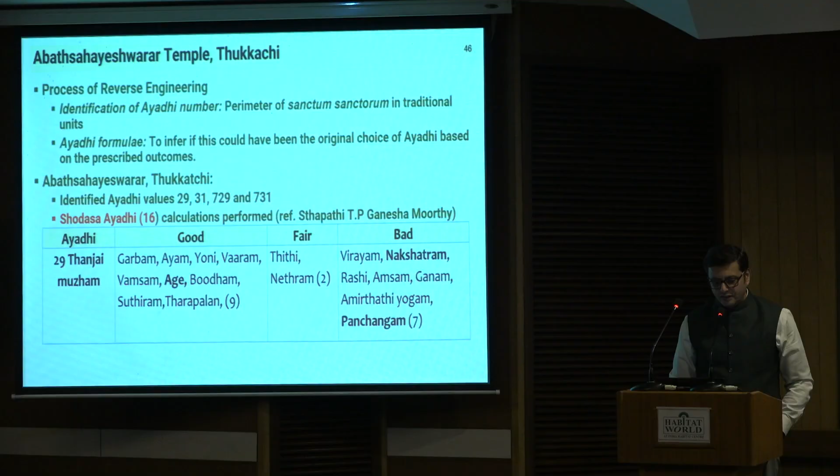It gave us an understanding as to why temple is of a certain dimension, and helped us appreciate the fact that it was a very intricate system of converting these measurements into an entire structure, including cross-section of the stone walls, depths of beams, sizes of columns, and so on. So this is mind-blowing, and I think it's very important that this sort of study needs to inform conservation to be sure that first we are appreciating, and then we are not deviating in the process of conservation, and recording it, which is the intangible knowledge in the whole system.

This project was completed in 2023. The temple, which was in disuse for so many decades, was completed. Consecration was held on the 3rd September 2025, and you should visit this beautiful temple, which is known to be of sculptural quality, which is amazing.

I'll close with this last project, which is again a very interesting project, which is completion of an incomplete construction in a temple. And it's very rare that you will have incomplete work in a temple, because it's considered to be the body of God. And why would you leave parts incomplete? But this is by proportions meant to be a 7-tiered, 7-storied gopuram or entrance gateway, but was never finished for multiple reasons, possibly diversion of funds or wars or whatever. You don't have signs of collapse, so it was not a structure that had collapsed. It was a structure that was never completed.

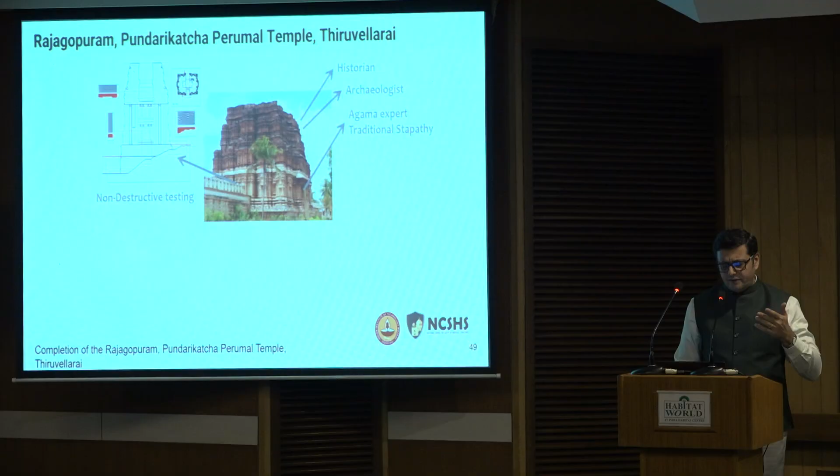So we did a lot of non-destructive testing. We looked at strength of the stone, strength of the brick, and tried to see if we add 5 stories to it, how is it expected to respond. So all the simulation was done, and this was probably the first temple Gopuram where we had drilled through about 4.5 meters to understand the layering of the stone, and that gave us an understanding of how the Sthapati actually does the calculation in terms of the wall cross sections for such massive constructions.

Interestingly, the Gopuram is built on a rock outcropping, so it's in a very stable situation. It's not on soil, and the upper portion is in brickwork and the lower portion is in the white color granite, and this is excellent brickwork with not even a plant growing in its joints, and you can imagine the quality of the joints to prevent growth of vegetation.

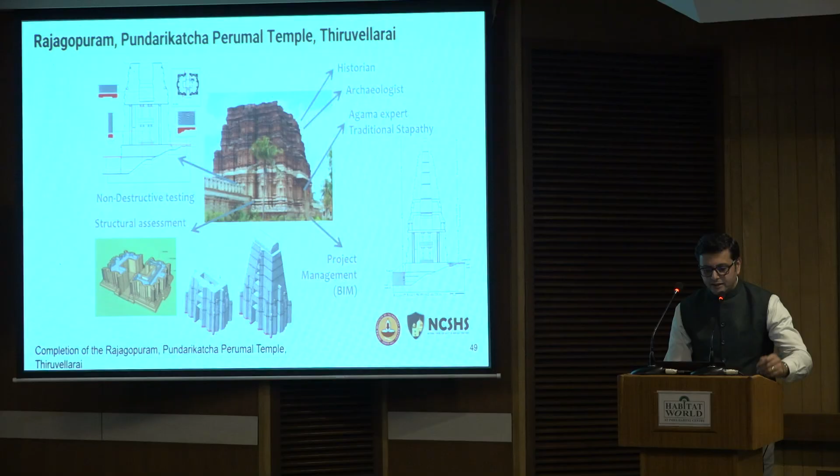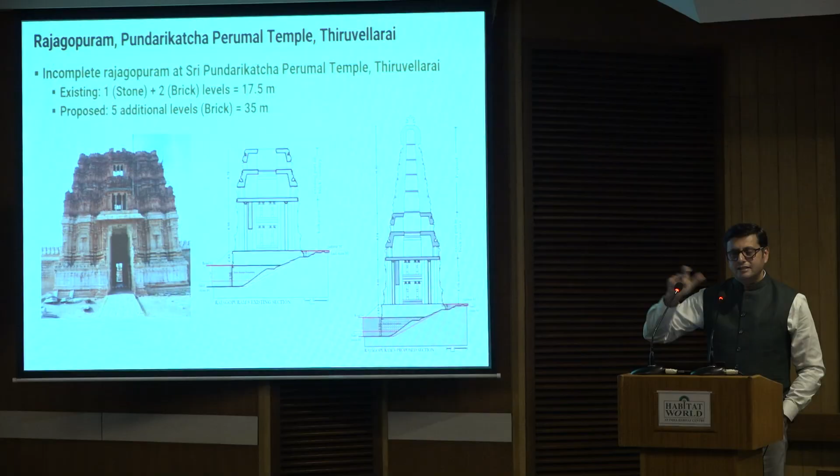So this is currently approved. This is conjecture. It did go through a lot of discussion between archaeologists, engineers, conservation architects on whether we should even allow completion of this, but the decision was finally in favor of completing it. And again, based on the original dimensions, the Sthapatis were able to demonstrate that it was meant to be a 7-storied construction. This is currently underway, and these are some pictures created by the Sthapati to explain how the flooring will be done, and we did the structural proof checking of the floor loads and so on.

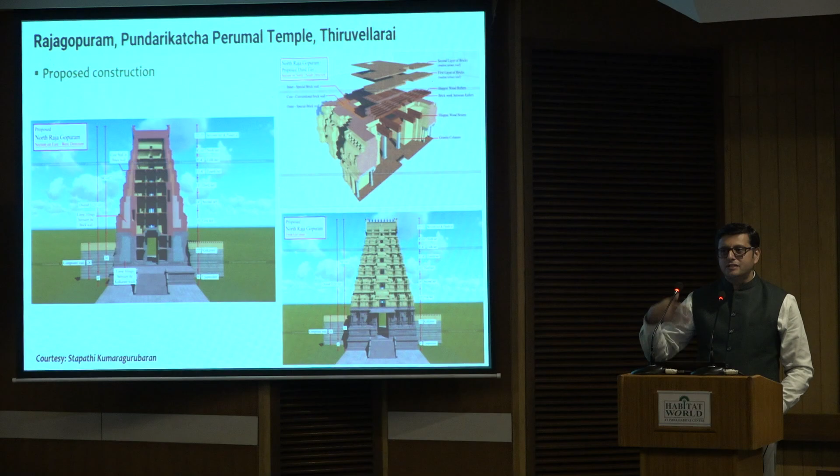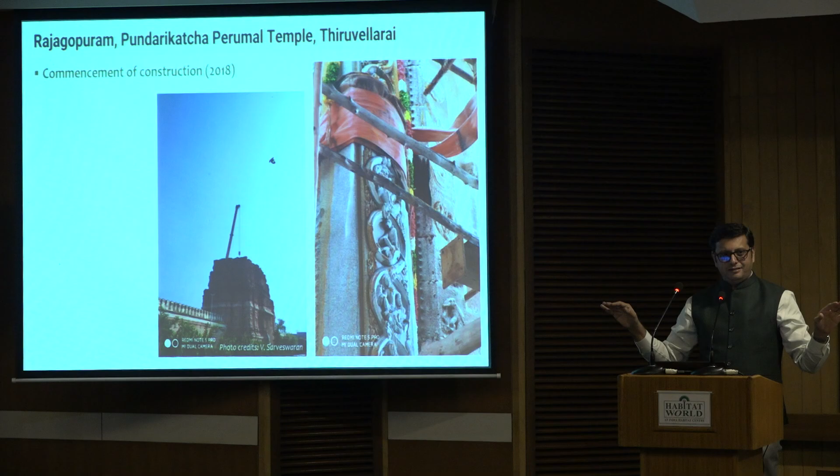And finally, this was the day when some of the damaged stone elements had to be replaced, so a crane had to be used for moving stone from inside. When you construct, you can see what you're constructing. But here, you needed a crane to stand outside, go inside and pick up something without visual contact. And I think it was marvelous to see how the Sthapati was on a walkie-talkie with the person operating the crane and was able to ensure complete safety and complete perfection in the execution of the work.

This is the situation today. We are at the 5th story, and in 2028, the consecration is expected. So if you happen to visit Thiruvellarai, you'll be happy to see this project.